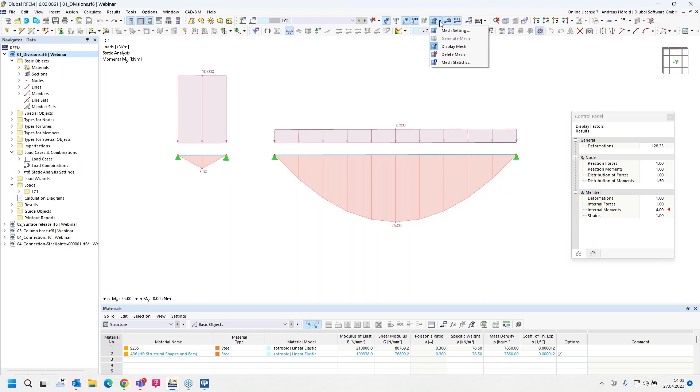How can we improve that? First solution would be to divide the longest member, or increase it. The second possibility is to increase the value for the member divisions in the mesh settings. The mesh settings can be found under Calculate and then Mesh Settings, or in the menu with this button here, then Mesh Settings.

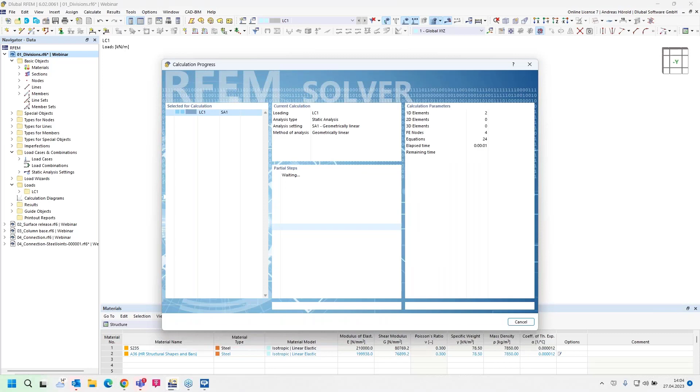For the member, the default setting for number of divisions for result diagrams is 10. If I increase that, for example, to 50, and press OK, apply, and calculate all again, then you can see a curve for the moment, and that display is correct.

That was the solution.

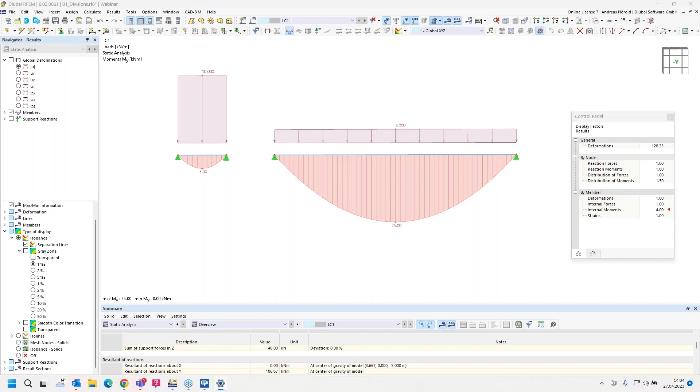Then we turn to the next question. Just a moment, I have to change the setting. Okay, so then the next model and next question.

The next question is, how can I set a contact condition between two solids? In earlier webinars, we presented special objects like the nodal release and the line releases. In this webinar, I would like to introduce the surface release. It's also possible to create surface releases, and I would like to show that in this example.

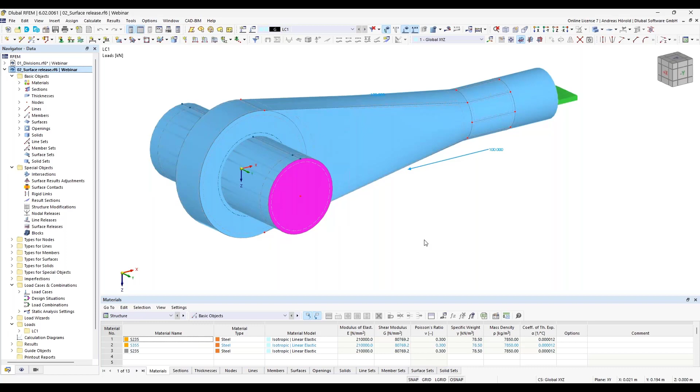This example shows a grommet through which a bolt is put in place. The contact conditions in this area should be defined so that the surfaces under tension can detach from each other. So if I load the bolt here, as we defined, it should be released on that edge here. So how do we do that?

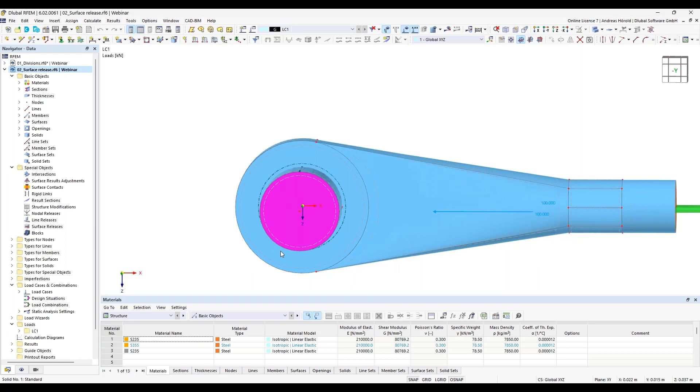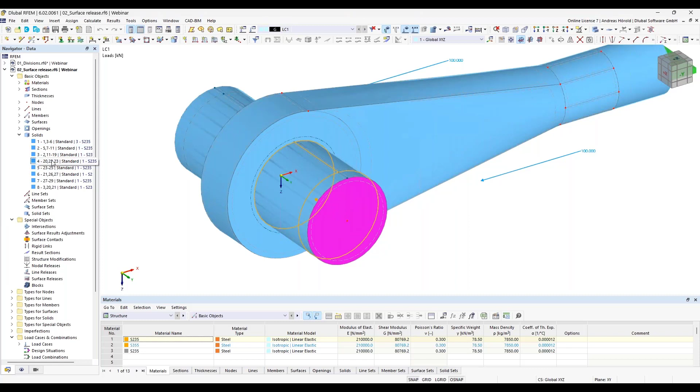Before I do that, I would like to introduce the solids here. On the left side, you can see the navigator data, and then you can see the solids - that ring here, this part, and so on. Solids 4, 6, and 8 should be released from the ring here.

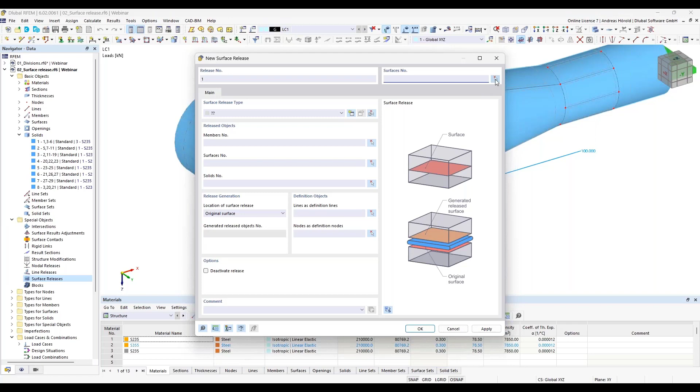Okay. So then I create a new surface release. On the left side, I do a right click and then new surface release. At first, I assign the surface. I switch to the transparent model. So, and that's the surface between the two solids.

Okay. Then next, the release type should be defined. I specify a small spring for the X and Y direction, to avoid numerical problems, and so that the bolt can be slipped out from the hole. So in the Z direction, perpendicular to the surface, I define a nonlinearity fixed if negative pz. Okay, that's all.

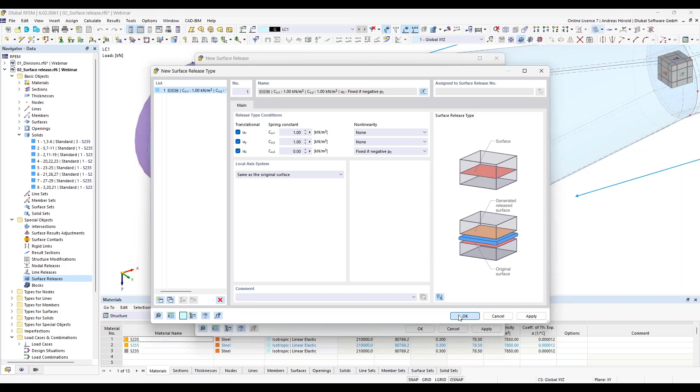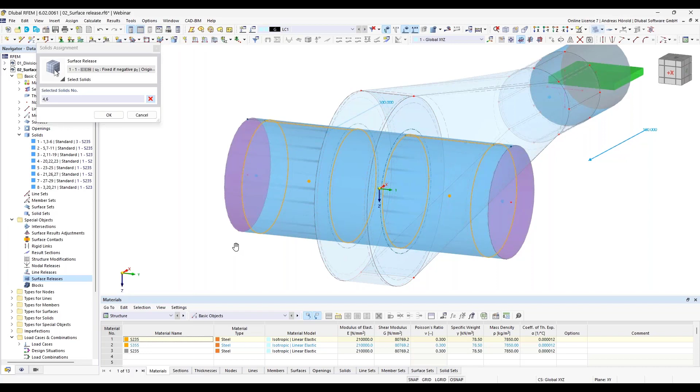So, and then I select the solids. So I move it a little bit. Okay, so then number 6, number 4, and here I switch to the wireframe model. One is not correct.

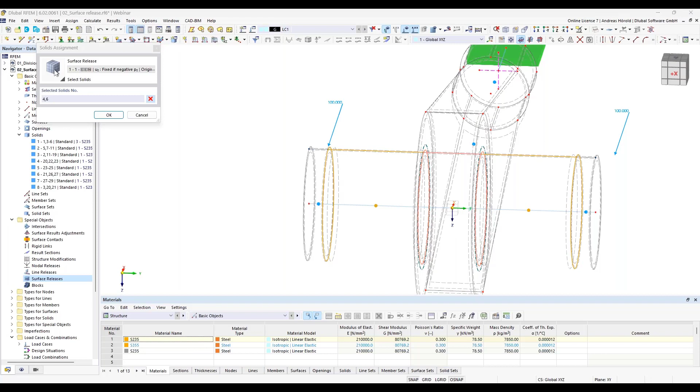There are two solids which have the same center, 8 and 1. I select 8. Okay, and now I've got 4, 6, and 8. It's also possible to define it directly here, 4, 6, 8. Okay, that's all. I apply that with OK. And after clicking OK, a note is shown informing about some missing entries, which can be corrected automatically.

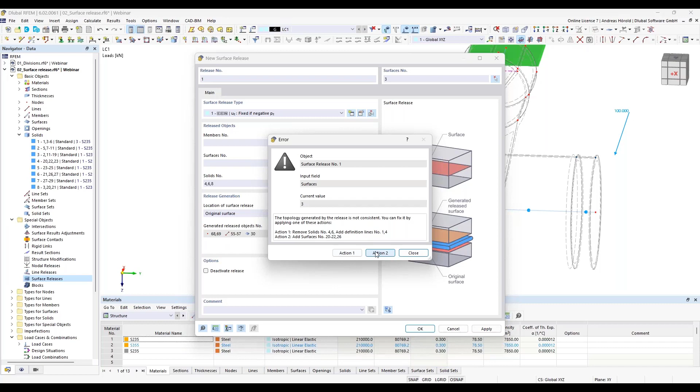So, and then I select action 2. There are some surfaces that must be released. Okay. So, and then all should be fixed, and I can calculate all. So that takes some seconds.

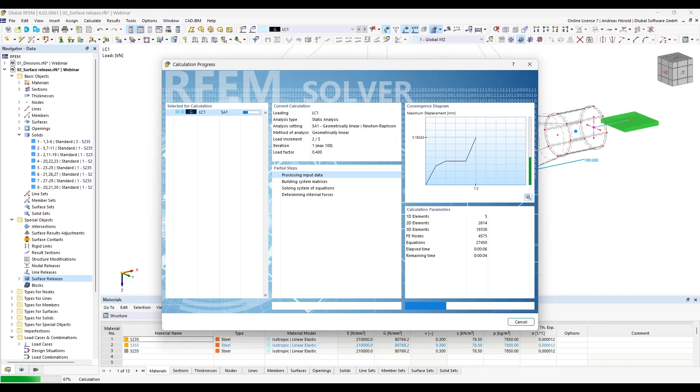And after the calculation, we can see that the solids are detached from each other. So I display in minus Y direction, and can also do an animation. And you can see that the bolt is released from the ring.

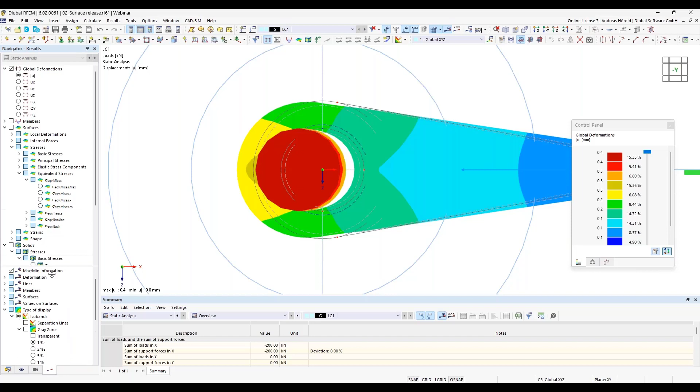We can also check the results for the solid. So solid sigma x, yeah, in that direction here. You can see there is only compression on that side and also on that side and no tension, because the bolt is released from the ring. Okay, that should be all to that question.

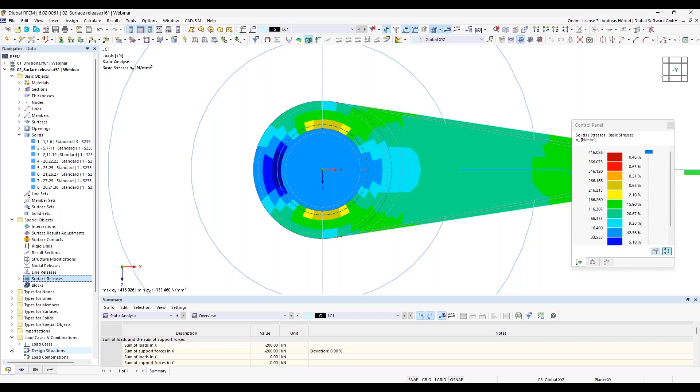I turn back to the first model. And the next question is, unfortunately, I'm not able to move my model by the mouse. Also shifting a node to another grid point does not work anymore. How can I reactivate it? Okay, what I mean is that I can't move or copy by drag and drop.

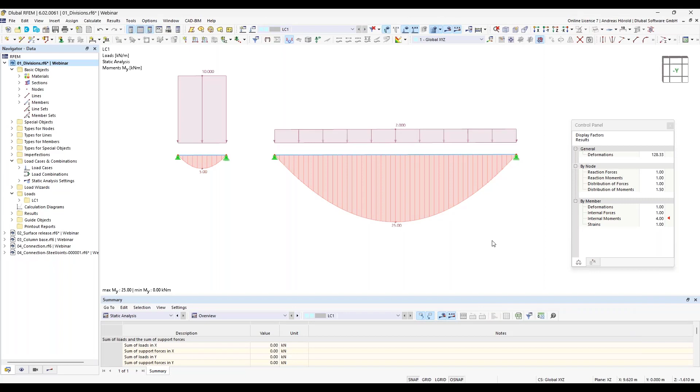You can reactivate it by a right click and then activate the drag and drop function again. Maybe that was deactivated by accident, and now we activate it again. And then I can move the node, for example, or I can copy that by drag and drop, and so on. Okay, that should be all to that question.

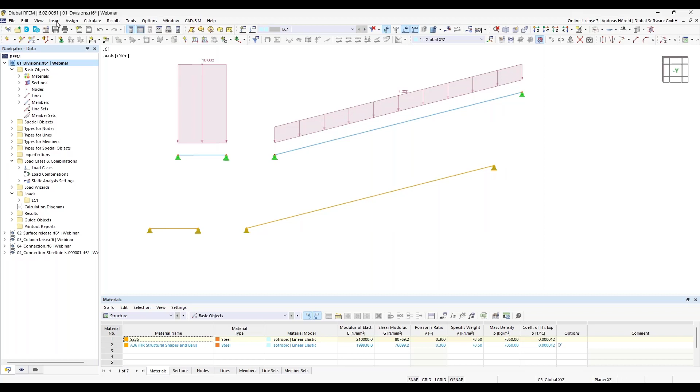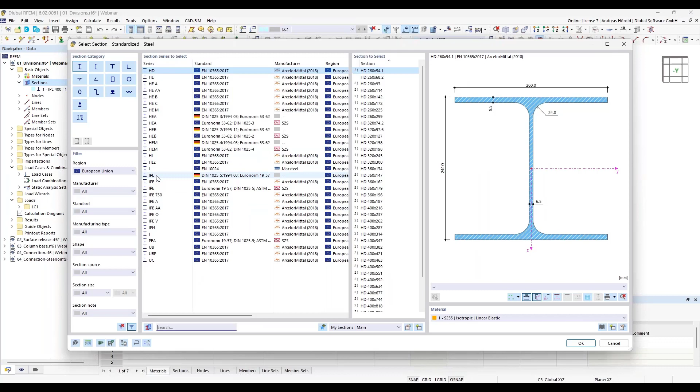We work with that model for the next question. And the next question is, how can I change a cross-section taken from the library concerning its dimensions to a specific value? So let's create a new section. I go in the navigator data for the section, and then I select new section. And I can, for example, choose a section IPE, for example, 300. Okay.

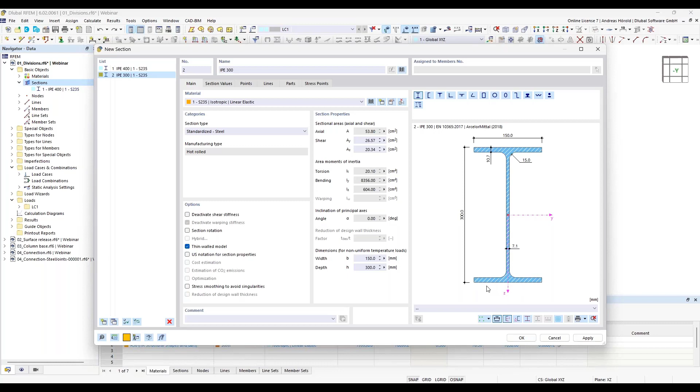So, at the moment, the section type is standardized steel. And if I want to modify the thickness of the web or flange, or the height, or maybe you have got an older cross section that is not standardized anymore, or you have got rusting on the web or the lower flange, and you would like to modify the cross section, then you have to change the section type to parametric thin walled. So then you can go to the next dialog and change the dimensions.

For example, because of rusting, you've got a web with a thickness of only 5 millimeters, or you have got rusting of 2 millimeters on the lower flange. If you have got it on the upper and lower flange, then you can change it here, or you can also change the type.

If you have got different flanges, for example, you can select such a single symmetric section. And if you have got rusting on the upper and lower side, for example, of 2 millimeters, then I would select 8.7.

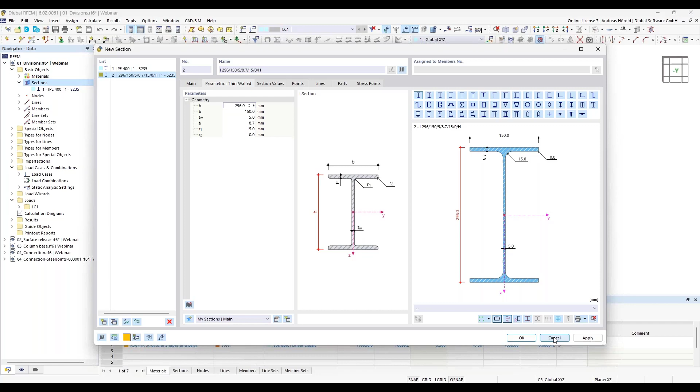And then I have to modify the 300 to 296. Okay. So that's one possibility. And the other possibility, of course, is to use our RSECTION, the single or the standalone program, and then you can use that RSECTION cross-section in the RFEM or RSTAB model.

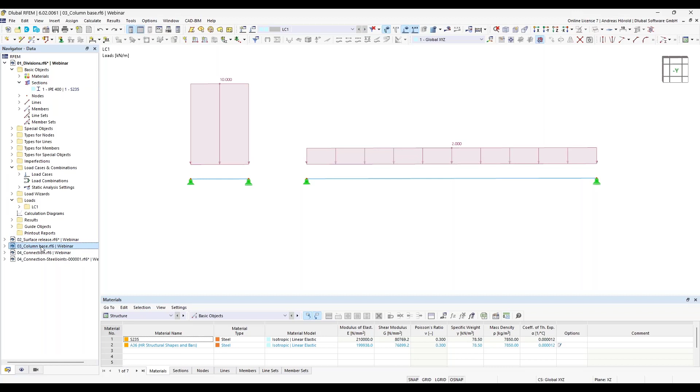Okay, so then we turn to the next model and the next question. And the next question is, I would like to hide my surface results for a certain area around the 0 value. Is there any elegant solution for this in RFEM 6?

If only individual areas in a model are decisive for the design, the evaluation based on isobands may quickly become confusing. And you can avoid that with that function here in the navigator results, and then type of display, isobands, and you can check the gray zones. So, and below the item, you can select a value between 0.1% and 50% to be covered by the gray area.

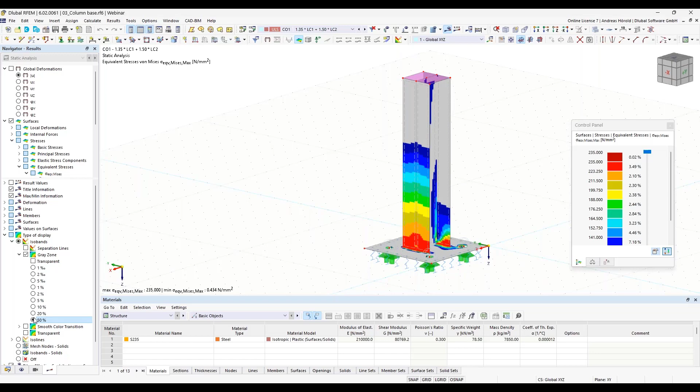It is only 0.1%, 1 promille, 1%, and so on. Yeah, I think a good display solution. Okay.

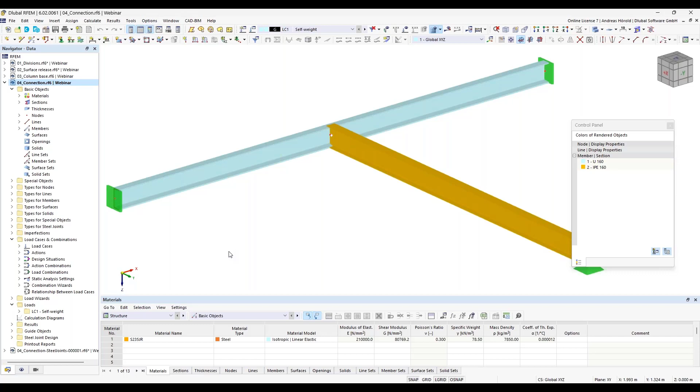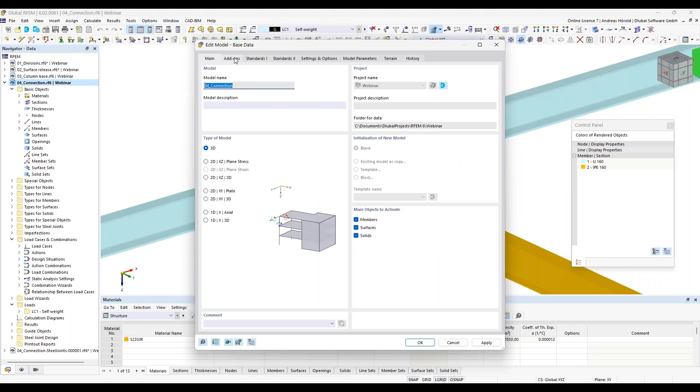Then we turn to the next question and the next model. And the next question is, how can I connect as fast as possible a beam to another beam by a fin plate using the steel joints add-on? Yeah, that's quite easy. First, I have to activate the steel design add-on in the base data. So left above, I've got the base data, and it's necessary to select or to activate the steel joints add-on.

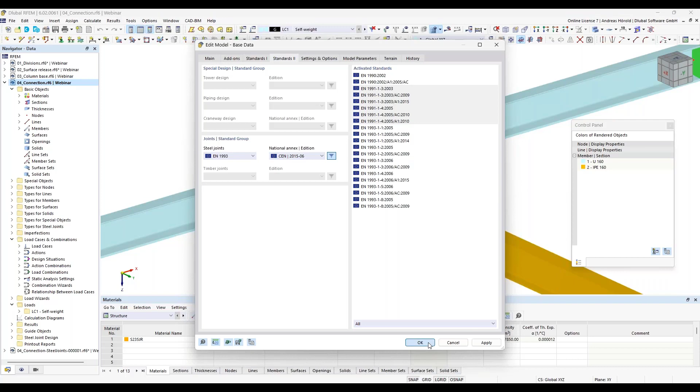And then under standards 2, you have to choose the standard and the national annex. I leave the standard national annex of the Eurocode 3. Okay. So, and then the types for steel joints is activated, and I can create a new joint by right-click, new steel joint. So, and in the main table, you can define the node to be designed.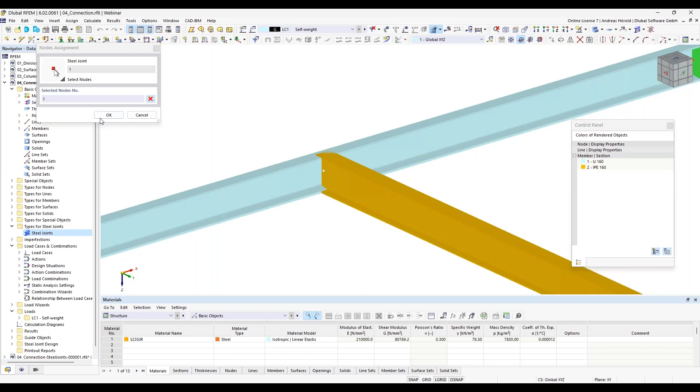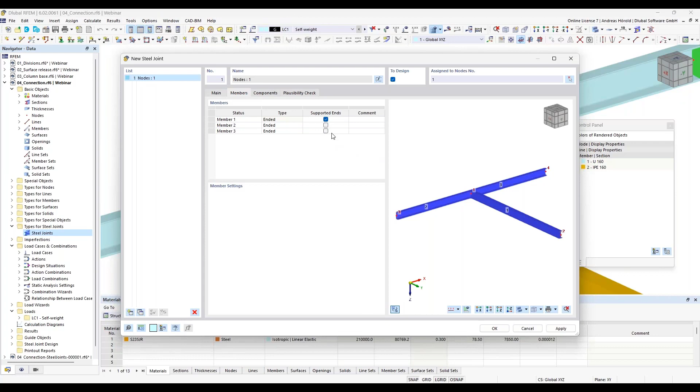So, okay. Now all the 3 members are selected. Now we need all the members. And I can select the next step. I have to define the supported ends. I define as supported ends the end of member 2 and member 3. And member 2 and member 3 are continuous members. So that should be all. You can also define the material. I use the material that is already defined in RFEM 6, and also the section.

So, and then in the components tab, we find all specification for the joint type. And with the insert components from library button, we can choose from various prefabricated categories. Now we've got the rigid connections here, the pinned, the truss, and the bracing. Okay, we would like to use a pinned connection, and you can see the beam to beam connections, beam to column, beam to continuous beam, column to beam, and cross joint. We select the category beam to beam.

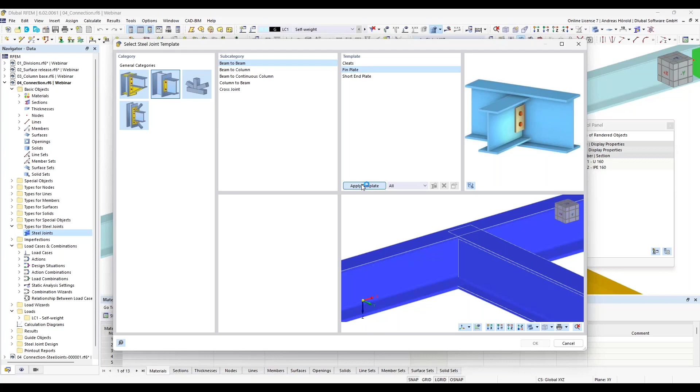Now we won't use the cleat, but the fin plate. Also short end plate is available. So, and if I apply the template, you can see a preview here. Okay, that looks quite good. And I can apply that with OK. So then we can see also the preview here.

And we can define the single parameters here. Member 1 is the connected member. Then the reference members in that case are the member number 2 and number 3. That's already correct. Then the connected member offset is parallel. That's okay. And the connected member end offset should be more than 10 millimeters. I select 70 millimeters, and you can see there's no collision or overlapping anymore.

Material for the plate is okay. We use the same material, the S235JR. Then the thickness is 10, okay. Alignment, connected member, that's also okay. The position, you can change that from front to rear, if you want. I leave it on the front, and I enter here my -30 for the offsets, -30, and the overlap should be 80. Okay. So, okay.

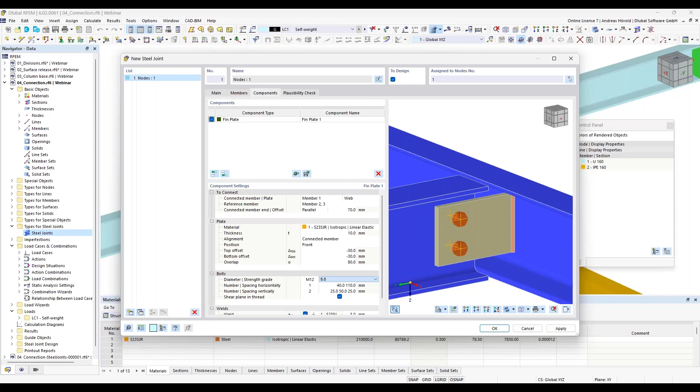So that's okay. Then I have to select the diameter between M12 and M36. All diameters are available. I now select M12 and as the strength grade 8.8. Then you can define the number of bolts.

How many rows, for example, 3, 2, and I select 1 row. And as spacing 40, and the other spacing is calculated automatically. The same is for the spacing vertically. I select 25, and the rest is calculated automatically as well.

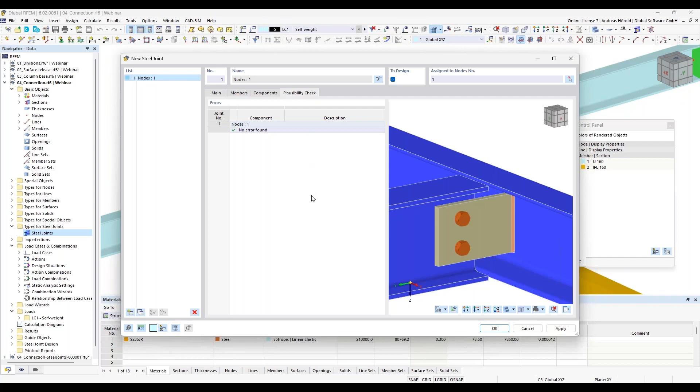Then you can consider that the bolt and the shear plane is in thread. I deactivate it in that case. And for the weld, I leave the 3 millimeters weld. Okay, then you can go to the plausibility check if all is okay. It's all okay now, no errors found, and I can leave the dialog.

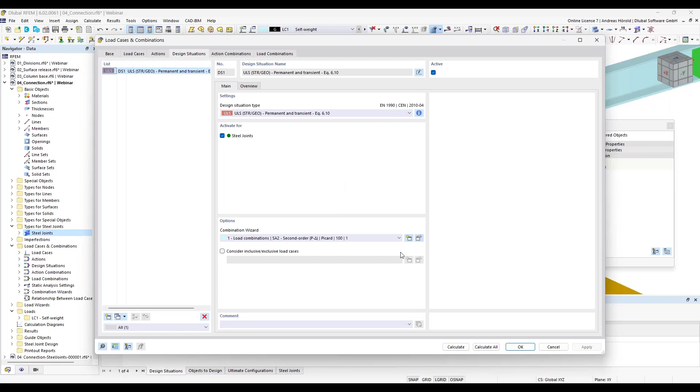And then in the table, I can turn to the steel joint design. I can, for example, double click on the ultimate limit state design situation so that I can check if the steel joints add-on is activated. That's the case. Okay, that should be all. Only one node: objects to design, and I can run the calculation. That should take a short moment.

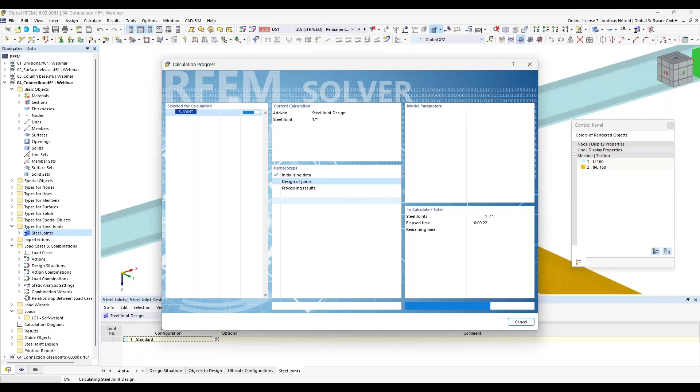So in the background, there's a model created, and the members are then surfaces in the area of the connection. I can show that later. That's why the calculation takes some time, but I think it's not too long.

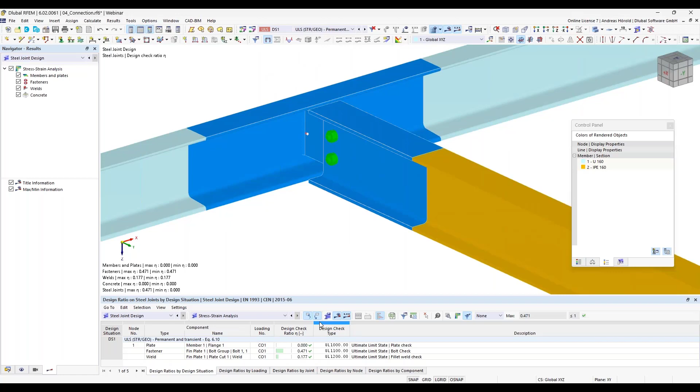Okay. You can see the design ratios in the table. And if I, for example, double click on that line here, or I can go to that button here, design check details. There are two possibilities. Then I can see the design details with the single design checks. Here on the right side, you can see the formulas or equations from the standard, and you can see from which standard and which part the formula is. That's the design for the fasteners, that's for the plate, and that's the design for the weld.

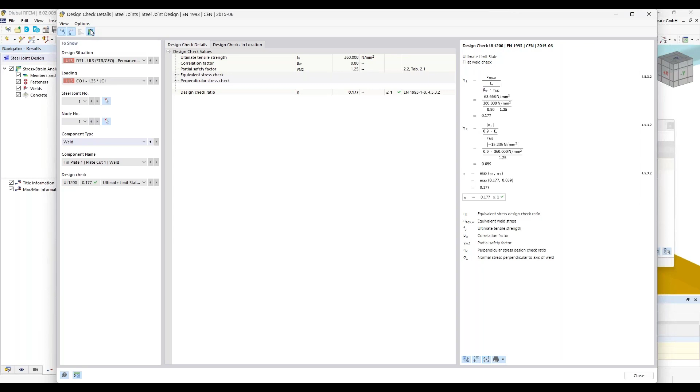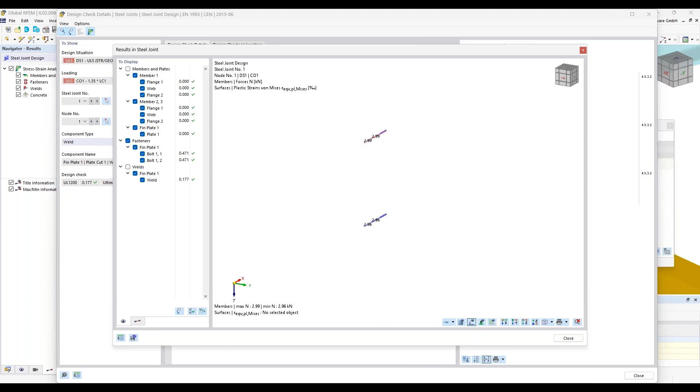Okay. And when clicking here left above the colored joint icon, you can also display the results of the joint model. Now you can deactivate some parts if you only want to see the bolts and so on. And if you click on the button on the left side, at the top and at the bottom, you can save a steel joint model. I already did that and would like to show you that model.

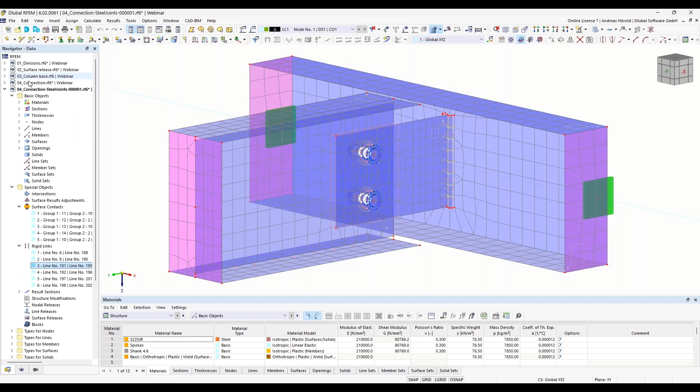So, that's the detailed model with all the results. I disable the results so that you can see the model, and you can see the different objects, for example, surface contacts, rigid links for the welds and so on. And that's the model calculated in the background, and you can see the results in the original model. And I will turn back to the original model. Just a moment. Okay.